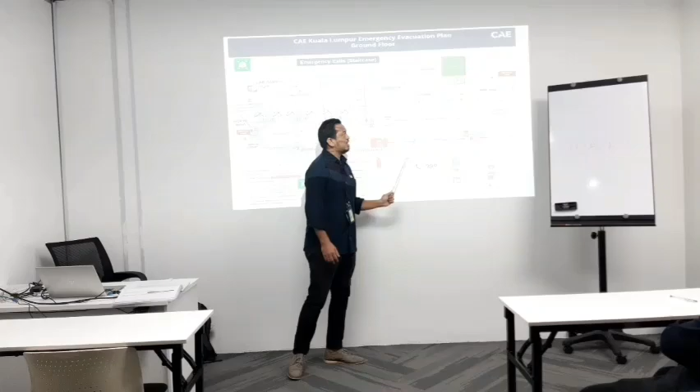At the south wing, we have another lobby at the entrance. So where's the exit? You can exit through the lobbies, and there is another escape route near the cafeteria. Looking at the facilities, the north wing is mainly for training sessions with simulators, while the south wing has our classrooms, located on the first floor.

So be aware that the exit areas are the north lobby, middle lobby, and south lobby, and we also have staircases. We have one at the north lobby, and another staircase here, numbers 4, 5, and 6. If you are sitting in the second lobby, you can use the nearest staircase, number 4 or number 5.

If you exit using staircase number 5, this is the shortest route for you to exit the building, as well as staircase number 4. This is another nearest staircase for you to evacuate.

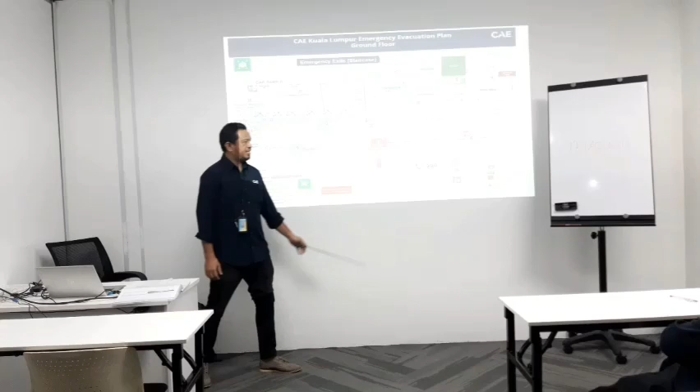So this layout shows the ground floor, and there is other information here, for example in case of fire, information regarding the fire extinguisher, and here to call 999 in case of emergency. The most important point for you to know is the assembly point, located at car park B.

So car park B - in case anything happens, you exit through the staircase and walk to car park B, where the assembly point is. There is another way, if you use staircase number 5, you can walk behind the building, heading towards car park B. So this is the assembly point.

In case of emergency, we shall gather here, and we shall collect the attendance sheet to make sure that everybody is out of the building. We have to confirm that everybody is safe during this assembly.

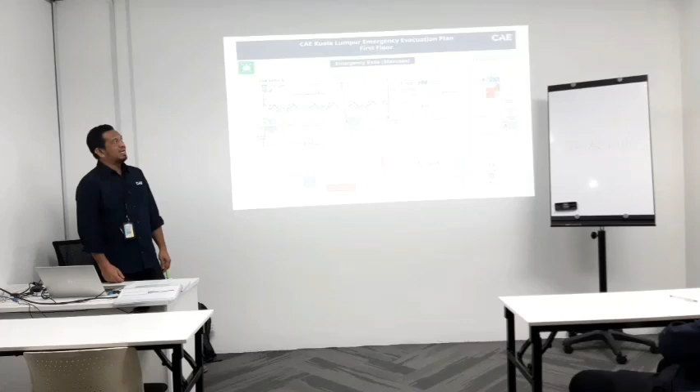Now showing you the facilities for the first floor. So we have the ground floor and first floor. Currently we are at the Kuching classroom. You can see that the nearest exit is staircase number 4, located at the middle lobby.

Since we have the CAE facilities layout for the first floor, I'm going to show you some other facilities. We have a surau, and a main office - in front of our classroom is our main office. There is also a simulator area. Basically, this area is not accessible to everybody, so you cannot simply go in and out. Within this area, you need an authorization card in order to access it.

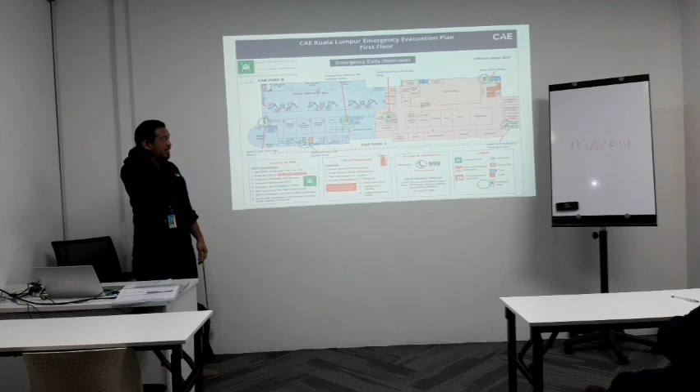Excuse me, where is the nearest toilet? The nearest toilet is at the surau, behind the surau. From our classroom in Kuching, you can go to the surau towards the end of the building, and there is another restroom accessible through this middle link bridge, and another washroom facility around here. So basically there are two, one for the south wing and one for the north wing.

For the ground floor, the restroom will also be at the same location. And if I show you the ground floor, the restroom is also available in the cafeteria. So very easy - you just minum kopi, and next to it there is a restroom.

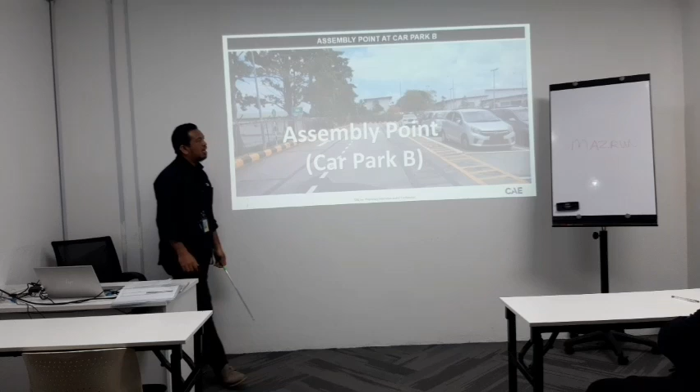Here is an example picture of our car park B. This is where the assembly point is, so everybody has to gather here. During an emergency, if you hear any emergency sound, you walk through to this point.

Bear in mind, do not run, but you can walk quickly. Do not run, do not shout, just avoid causing any chaos. Just walk quickly to the assembly point.

And then if you spot an emergency, raise the alarm, shout emergency, emergency. So this is something like if you see any potential of a fire, you need to shout to alert everybody that you are facing a fire or any critical emergency.

In case of fire, there is a break glass facility. This is to activate the alarm if you see any fire. You can break this glass and then activate the fire alarm. It will tell everybody the building will activate alarm warning. So in case of any possibility of fire, this is what you should do.

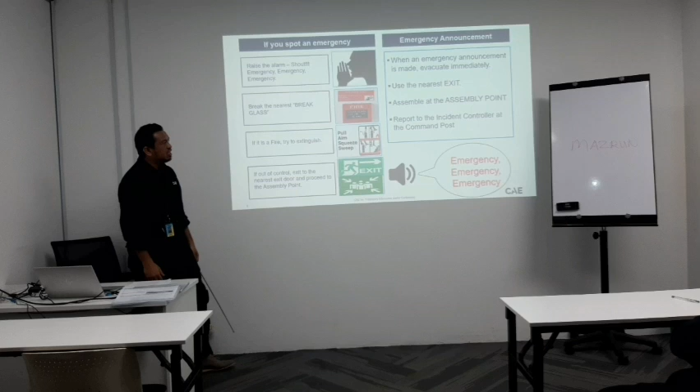You have to know how to use the fire extinguisher bottle. We have pull, aim, squeeze, and sweep. So basically, this is the basic principle of how to use the fire extinguisher bottle to do firefighting, if you can do so.

Some people don't know how to use it. They just take the bottle, don't know how to use it, and they throw the bottle into the fire. So do not ever do that.

And then we have exit signage. Be alert that there is exit signage in case you are not able to fight the fire. In case the fire becomes much worse, find the emergency exit and head to the assembly point, which is located at Car Park B.

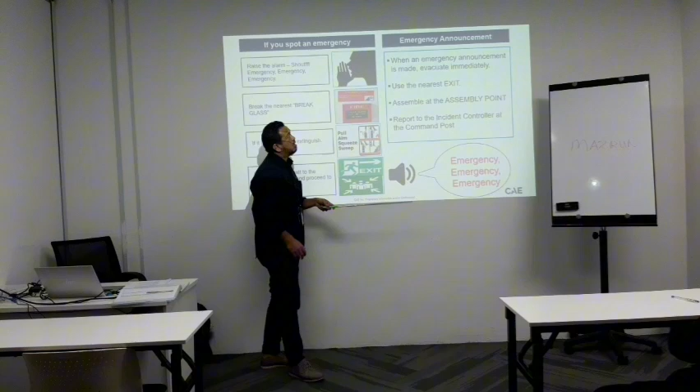When emergency is announced, if you hear any emergency announcement, evacuate immediately and use the nearest exit. If you don't know what to do, the first thing you need to find is the green exit sign. Then assemble at the assembly point, located at Car Park B, and report to the incident controller at the command post.

Lastly is the safety tips. Basically, the safety tips are for us around here. Do not drive your vehicle fast in this vicinity. Follow the speed limit and observe pedestrian movement, because we have a lot of people walking around.

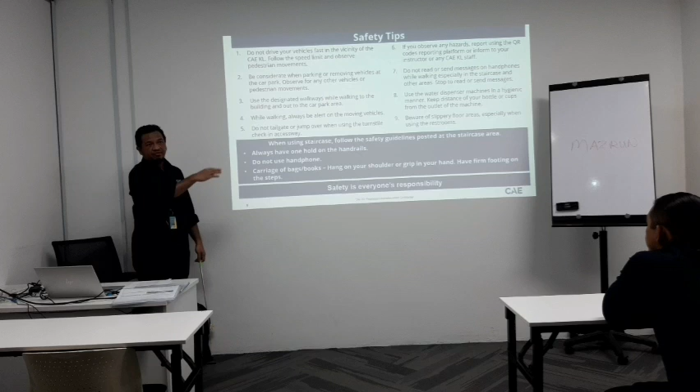Do not drive too fast because you have to drive around the facilities in order for you to exit the CAE building.

Be considerate when parking and removing vehicles at the car park: observe any other vehicle or pedestrian movement, and use the designated walkway while walking to the building and out of the car park area.

Another tip is while walking, be alert of moving vehicles. Maybe you are not aware that a car is driving through and you need to cross. So be alert. Do not use your phone all the time while walking. Be alert of what's around you.

Do not tailgate or jump over using the turnstile checking access way. If you observe any hazard, any potential hazard, you can report using the QR code. Basically, the QR code is for you to highlight any potential hazard.

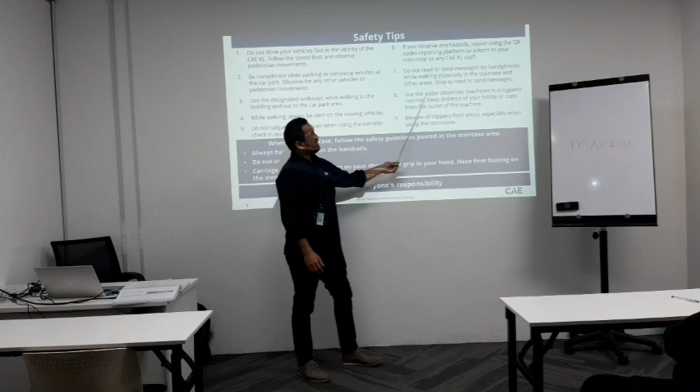Do not read or send messages on your handphone while walking, especially while using the staircase. Use the water dispenser machine in a hygienic manner. Keep the distance of your bottle or cup from the outlet machine.

Since we had COVID-19 last time, this has become something to alert everybody about. Do not let your bottle, or the neck of the bottle, attach to the water outlet on this dispenser. Keep it away. This is to maintain our hygiene.

Beware of slippery floors, especially while using the restroom. When using the staircase, follow the guideline: always have one hand on the handrail. Do not use your handphone, and carry baggage or books on your shoulder or in your hand. Have firm footing on the steps.

Okay, so that's just the safety tips. Any questions so far? No.

Are you guys okay with the facilities? After this, maybe you can have a look around, and remember the key point is to go to Car Park B in case an emergency happens.

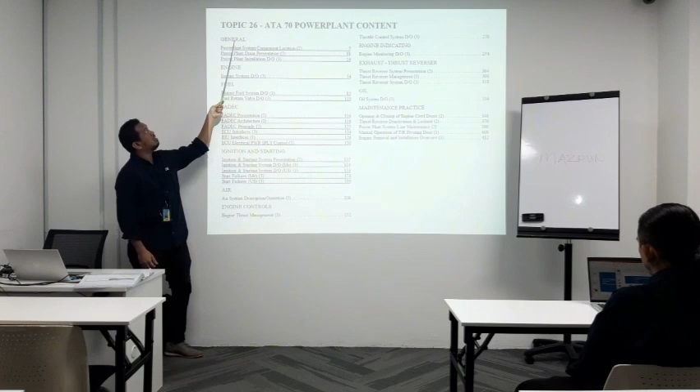Okay, our topic is Chapter 70, Power Plant. Over here we have the table of content for this session. We're going to cover 2 hours regarding engine general, and in this topic we're going to cover several subtopics, which is component location, engine drains, and also engine power plant.

We shall then cover engine description and operation. Over here we're going to have a look at the system overview. So these two topics we're going to cover for today's session.

Now in this slide presentation, you will be able to see the exploded view of the CFM56 engine, and be able to see the fan cowl, the thrust reverser cowl, and the center body as well as exhaust.

Now this engine, the power plant section, is the one that you see, and the engine itself is considered the core. The exploded view in this picture is the power plant. Another one I forgot to mention is the engine inlet. So all these are the power plant, starting with the thrust reverser cowl.

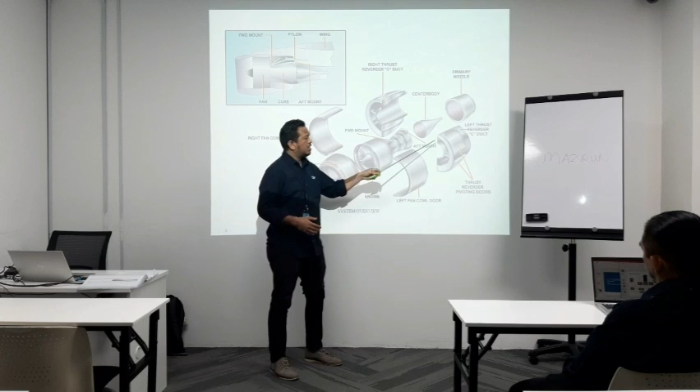For the A320, the config is using a blocker door type of thrust reverser system. So it will activate towards open whenever the thrust reverser is activated.

The fan cowl, later on we shall see there are 3 latches in order for us to open it. So unlock the 3 latches, we're able to open the fan cowl left hand side as well as the right hand side. While on the thrust reverser cowl, we've got 4 latches. You have to unlatch all 4.

Then we need to use an external device, the hand pump, to hydraulically open the thrust reverser cowl. You cannot pull the thrust reverser cowl by hand because it's quite heavy. But the fan cowl, we can use our own strength.

Once you open the 3 latches, using manpower we can pull it towards open. Then there is a facility, the hold open rod, for you to make sure that the fan cowl stays open, so that you can perform any maintenance tasks around this area.

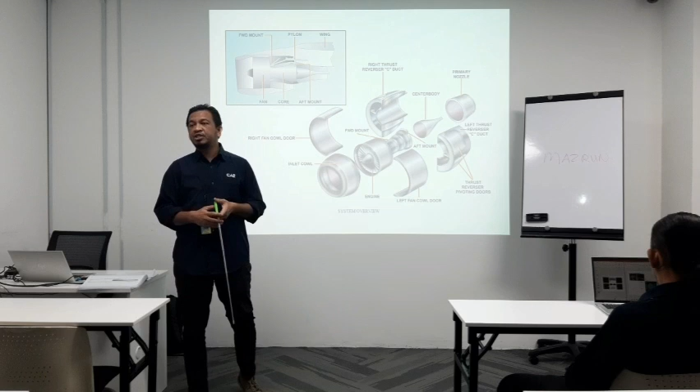So that's the power plant. Let's take a look at the core, where the core of the engine consists of the fan as well as the engine core. The fan and the core are mounted on the aircraft using a forward mount as well as an aft mount. The forward mount is used to take the thrust load, the engine thrust load. As the engine moves forward, the forward mount is the one that takes the thrust load and transfers it to the aircraft.

The aft mount is used to take only the vertical load as well as side load. The thrust load is only taken by the forward mount. From this picture, we're able to see the location of the forward mount, which attaches to the pylon, and the aft mount that also provides attachment to the pylon.

Okay, shall we move on? Yes.

Now we've got the system overview for the thrust reverser system. For the A320 thrust reverser system, it employs several defense lines to prevent thrust reverser activation in flight. The thrust reverser can only activate on the ground.

Due to an accident previously on the 767, even though it's a different aircraft, EASA certification requires several defense lines for thrust reverser activation during flight. There was an accident where the thrust reverser deployed during flight. It became scary, as it caused the flight characteristics to be jeopardized, and caused the aircraft to crash.

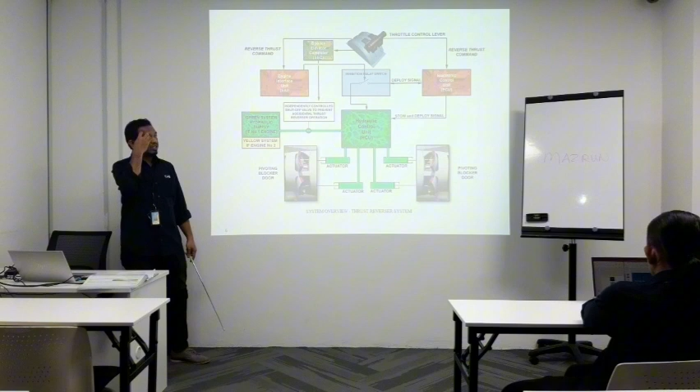This picture shows you the blocker door in the deployed position, and it is deployed by the activation of individual actuators, numbers 1, 2, 3, and 4. So it is obviously hydraulically operated.

The hydraulic supply may come from engine number 1, coming from the green hydraulic system, and engine number 2 may come from the yellow hydraulic system. So since we've already identified what components are available on the thrust reverser system, let's take a look at how the system works.

Excuse me, why do they use one green, one yellow system? Why can't they use only a single system, green for both engines?

Now on the A320, you're actually able to deploy one thrust reverser for landing. One thrust reverser activation is no problem because on the A320 the engines are located very close to the fuselage, close to each other. One thrust reverser deployed should be no problem.

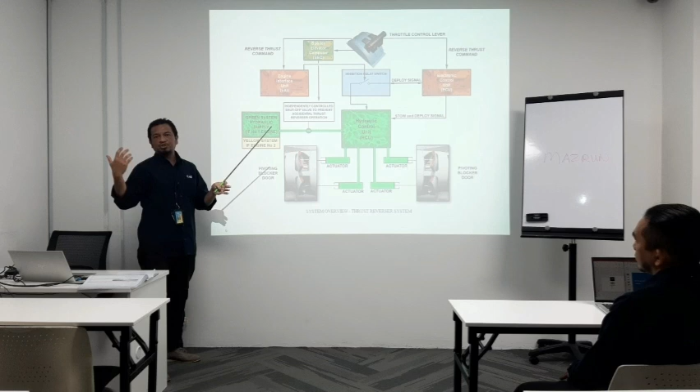In order to provide redundancy into the system, we've got the green system that supplies engine number 1, and the yellow system that supplies engine number 2.

In case the green system fails, the other engine can still deploy thrust reverser, using the yellow system as a redundant system. Same goes for the yellow system failing - you can use the green system. You can only use one thrust reverser, on the left hand side, at one time, which is not a problem.

The flight crew are still able to steer the aircraft in case only one side of thrust reverser is deployed. So it should be no problem.

The activation starts with the thrust lever. Once the flight crew move the thrust lever to reverse thrust, it sends a signal to the SEC, and at the same time it also sends a signal to the EIU.

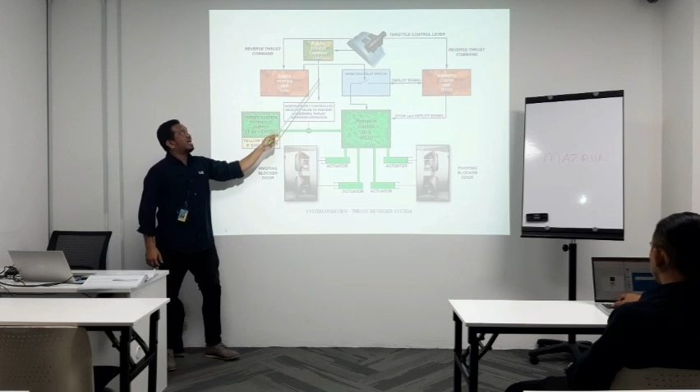Whenever the SEC sees that the aircraft is on ground based on the radio altimeter signal, it will then activate hydraulic shut-off. This allows hydraulic supply to the thrust reverser system, and this is actually breaking the first defense line. The permission is given by the SEC - once it sees the aircraft on ground, it gives permission. Without hydraulics, you cannot activate thrust reverser, meaning if the aircraft is in flight with no hydraulic supply, there's no thrust reverser in flight.

If the permission is only given by the SEC, we got the first defense line that will prevent thrust reverser deployment in flight. Now secondly, the second defense line is via EIU, the engine interface unit, which provides permission to the inhibition relay.

We already got thrust lever in reverse thrust. The second defense line - EIU receives signal from LGCIU, which is not shown here. LGCIU provides information on whether the aircraft is in flight or on ground. In case aircraft is on ground, the EIU will then provide permission to the inhibition relay and activate it. Once the inhibition relay makes contact, the ECU has control over the thrust reversal system.

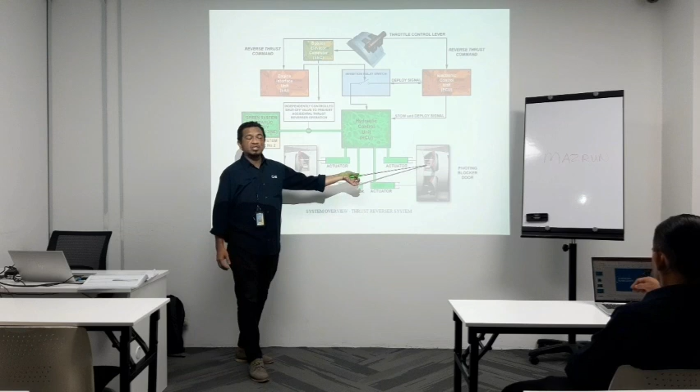ECU provides control over thrust reversal by controlling the hydraulic control unit, which allows hydraulic pressure to be supplied to all four actuators. Now the blocker door is in deployed position. Once the blocker door is deployed, the ECU then controls engine thrust, whether to have maximum reverse or minimum reverse. So the ECU is the one that commands the hydraulic system for thrust reversal, whether to open, extend, or close the blocker door.

The blocker door will start to move towards close once the thrust lever moves to the forward idle position.

So this is showing you the left engine, which is powered by green. The yellow system on the right engine is also identical - it's the same system, just that the hydraulic supply is coming from a different source.

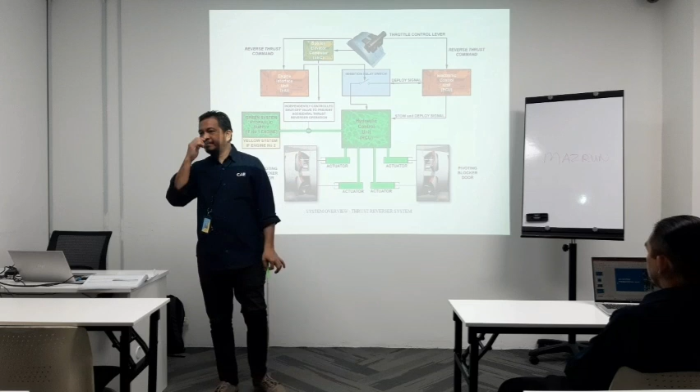Okay, any question? No question? Am I done, did I do a good job, or is nobody listening? Understand, okay, so very direct principle.

Alright, we shall then move on to component identification, component location. The first picture here shows you the ECU, the location of the ECU.

We have to be aware that for the CFM56 series engine, the right hand side is where you can find mostly dry components, while the left hand side of the engine mostly has wet components. Looking on the right hand side, we got the ECU and this is where it's located. The larger picture shows us the ECU, and we can see the orange ducting is the cooling.

So this is the orange ducting, the intake scoop. Air may go in, air may go out via this open port, and it's used to provide ECU cooling.

The ECU is mounted by 4 locking bolt attachments to the engine fan casing, and we got 15 cannon plugs located under the engine, under the ECU, and the ECU actually controls the engine using 2 separate channels.

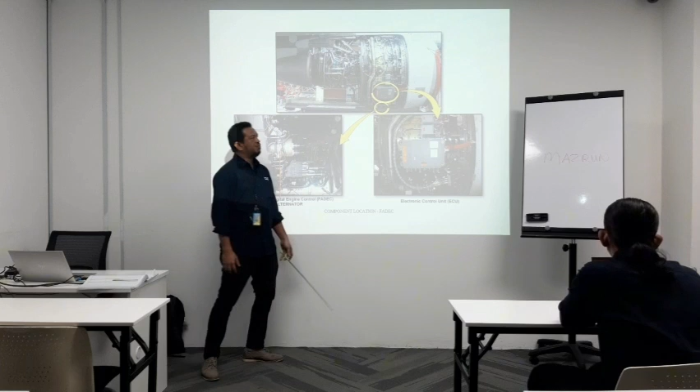From the same picture, we are also able to see the other component, which is the ignition exciter. This is for the system to provide ignition supply, to provide ignition starting.

At the bottom of the ECU, we are able to see the other component mounted on the gearbox, which is the PMA, Permanent Magnet Alternator. The PMA is driven by the gearbox. Inside the PMA is actually a mechanical driven alternator, and it has two independent power supply sources.

One cannon plug is used to provide power supply for channel A. The other cannon plug is used to provide power supply to channel B. So you can see two cannon plugs.

Once engine running and the gearbox also running, same goes to the alternator. Once the alternator running, it provides power supply to the ECU. The ECU is no more taking or using any power supply from the aircraft network.

Moving further, this is the picture of the ignition exciter. We've got two boxes. This independent box provides power supply to ignition A. The other box supplies ignition B. So we've got two igniter plugs at the combustor, which is located here.

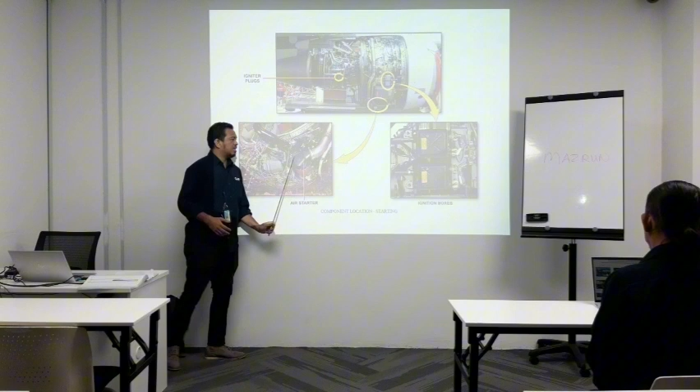Inside the starter there is a turbine that turns once the bleed pressure is applied to the starter, giving rotational motion to the gearbox. It will then turn the engine, and we can use this to start the engine.

The starter will engage right up to 50% N2 of engine speed. More than 50% engine speed, the starter will be cut off. The control of the starter is achieved by the ECU via the start air valve. The start air valve is the one that allows bleed pressure to pressurize the starter, or disallows the pressure.

The start air valve is solenoid operated, controlled by the ECU. So the ECU will look into the engine speed. If we perform engine start, the ECU will control the start air valve, allowing initial rotation until the engine reaches 50%.

Then the ECU will close the start air valve, because 50% is the speed of the engine that is able to reach self-sustaining speed, or idle speed.

Moving further, another component location, we are looking into the left hand side. Left hand side is where this engine is equipped with most wet components.

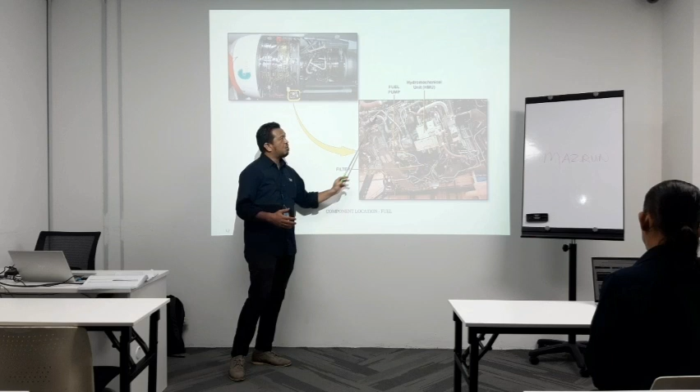We shall go into further detail in the next lesson regarding the operation of the HMU. But currently, we identified the components located on the gearbox. This picture shows you the aft face of the accessory gearbox. There are many components, many part lines, but the major components we are able to see here are the fuel pump and also the HMU.

Now we move on to component location for the engine air system, also known as engine control system, which is further divided into sub-control systems. The first sub-control system is the compressor air flow control. The second one is turbine clearance control.

Starting with the compressor flow control, there are two main systems that control the compressor airflow. The first main system is the variable bleed valve. These are the component locations, which are located at the fan area. We've got 12 of them.

Now this provides opening and closing in order to condition the air from the fan, from the booster, before it goes to the compressor. So to prevent choking within the compressor module, the bleed valve will open and close in order to condition the air.

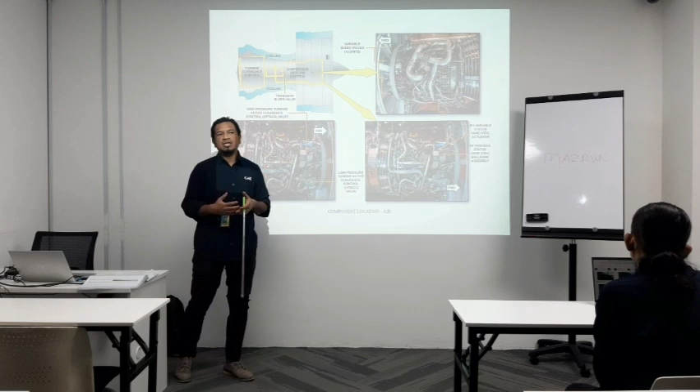Moving further, turbine clearance control is a system that provides cooling to the turbine component, basically controlling the turbine casing. The turbine's operation is to extract energy from the gas flow. The combustor gas flow will turn the turbine, extracting energy from this gas flow. With turbine blade as well as turbine casing, we can extract more energy by controlling the turbine casing clearance.

This clearance between turbine blade and turbine casing, maintaining the gap, is achievable using cooling air. The cool air may come from the secondary airflow through here, and we have the low pressure turbine active clearance control. This valve controls cold air and provides cooling to the turbine casing.

Another subsystem is the high pressure turbine active clearance control. It does the same thing - it provides cooling, controlling turbine casing expansion to provide a smaller gap. Whenever you have correct clearance between turbine blade and turbine casing, you can extract more energy. So the cooling is achieved by two subsystems: high pressure turbine active clearance control and low pressure active clearance control.

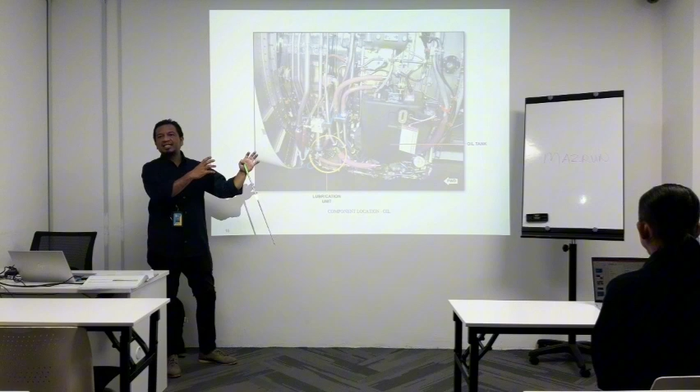Next, looking at the oil component location. This picture shows the left hand side of the engine, where the main component is the oil tank, used to house the engine oil. The oil system on this engine is a dry sump system - you have a dedicated oil tank separate from the oil system. Above the oil tank we have the oil quantity transmitter, which provides sensing of the engine oil level.

And then we have the oil cap, used to provide servicing, and facilities for inspection. The facilities of this oil sight glass allow maintenance personnel to see the actual quantity inside the oil tank.

From this picture, we can also see the lube unit. The lube unit is a unit that houses the high pressure pump and the scavenge pump. The high pressure pump is driven by the accessory gearbox. From this picture we're unable to see the gearbox, however at this location we have a gearbox used to provide rotational motion to the pump.

The lube unit also consists of the oil filter. This is the oil filter housing, which is to prevent contamination over the lubrication system.

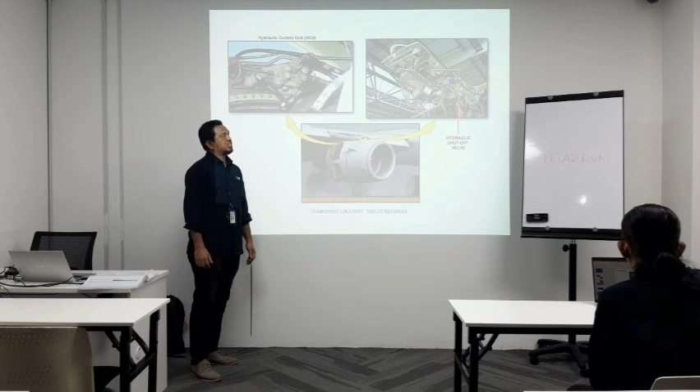Next, component location for the thrust reverser. The thrust reverser here is the hydraulic shut-off valve, located at the pylon, accessible from the left-hand side. Then we have the HCU, hydraulic control unit, located at the forward flange of the C-duct. We have a cannon plug, two cannon plugs, and another cannon plug for the pressure switch.

This is the one controlled by the ECU in order to deploy the thrust reverser system. So here is the HCU location, and here is the hydraulic shut-off valve location. Alright, that's the component of the thrust reverser.

Alright, we have completed component location. Any questions?

Good? No question. Can you guys remember all the components and the location of the components? Some of it. Alright, basically you got an idea of the components.

Later on we shall go further in detail on how the system works, the operation.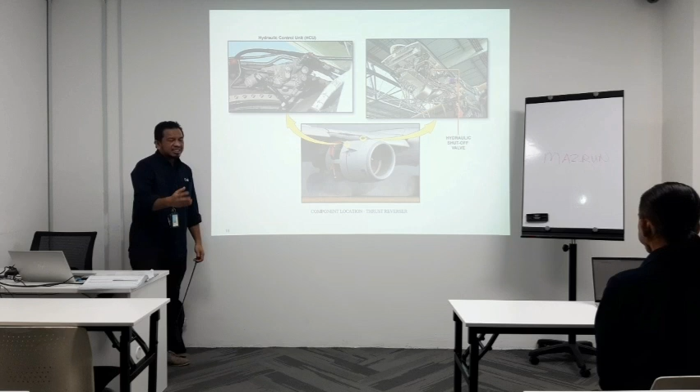The picture shows you the best view, taken from the manufacturer, where you can see, no engine, but you're able to see the location of the hydraulic shut-off valve. Some of the pictures are unable to be shown on the slide, but later on we shall go further in detail on the system operation.

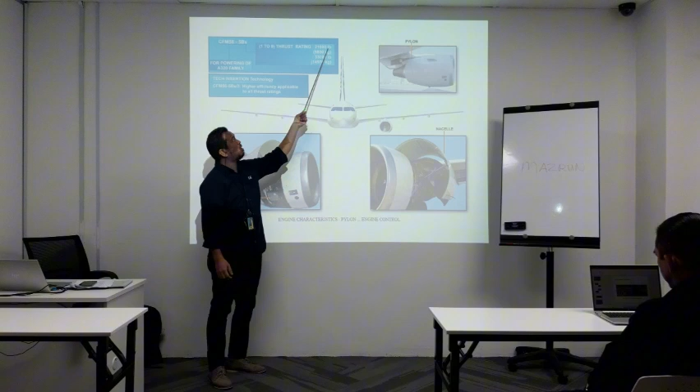That's 5BX. So 5B is the model used on the 320, and X is the thrust rating, which can be numbered from 1 to 9. Later on we shall see the representation of 1 to 9. Basically, 1 covers from 21,000 pound thrust, and it can go right up to 33,000 pound thrust. So depending on the type of variant that you have, it will give a different engine thrust rating.

Now, the tag inscription CFM56 5BX. X, as I mentioned, is rated 1 to 9, which shows you the engine thrust. We got /3 - this is one of the variants where /3 means higher efficiency, applicable to all thrust ratings.

The other variant is 5BX/3, or maybe you may have a /P engine. The /P engine has higher relight capability. So depending on the variant that you have, maybe you have 5BX/3 or /P engine.

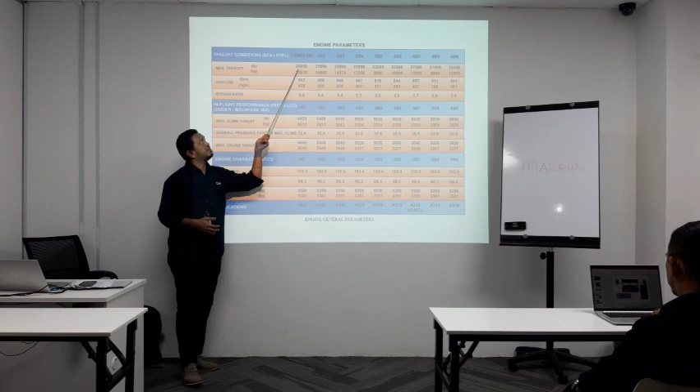Now, there's 5BX, X representing a number from 1 to 9. Here's an example, and here you've got maximum takeoff thrust in number, in pound or kilo. So looking into 5B1, 5B2, 5B3, right up to 5B9: 5B1 is 30,000 pound thrust, 5B2 is 31,000 pound thrust, 5B3 is 33,000, 5B4 is 27,000 pound thrust, and you can see the difference right up to 5B9. These are the variants offered by Airbus.

For Asia, mostly they use the 5B4 engine, which is 27,000 pound thrust, or maybe the other variant is 5B6, 23,500 pound thrust.

And this schedule shows you many more information, for example like maximum climb thrust, overall pressure ratio, and we got bypass ratio. Looking at the 5B4, it's 5.7 to 1 bypass ratio. The 5B6 is 5.9 to 1 bypass ratio. So these show you different engine variants, and it has a slightly different configuration.

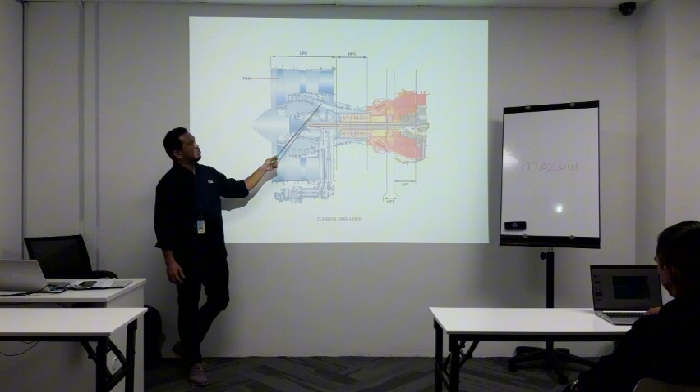And we got primary airflow that goes to the core of the engine. This is the air used for combustion, and only about up to 15% of thrust can be generated at the turbine section. But mainly the primary airflow is used to provide rotational, or extraction, energy from the turbine, which is used to provide rotation to the fan blade, and the fan is the one that propels the engine to move forward.

Starting with the fan: the fan is made from titanium material, and it consists of 36 blades. Moving further, we've got the booster section, which consists of 5 stages, but the booster alone is 4 stages.

And we've got VBV, variable bleed valve. This is the subsystem for compressor flow control, which is used to condition the air before it goes to the high pressure compressor. So the air will pass through the booster section, and it will boost up pressure by about 1 to 200 psi.

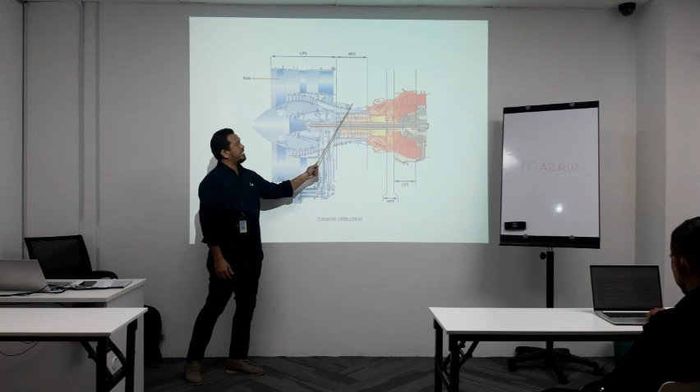Here we're able to see the component used to control the variable stator vane. The variable stator vane will adjust the angle of the first 5 stages of the stator. This is to increase the stall margin of the engine, so it's able to provide more compression to the engine depending on the engine speed.

And then we got the combustor. For this engine, Airbus or the engine manufacturer offers 2 types of combustor: annular type or dual annular type combustor. In this picture, we see the single annular type combustor.

And we got the single stage of HPT, high pressure turbine. This is used to provide rotational motion to the high pressure compressor by a single shaft.

And next, we got the low pressure turbine. The low pressure turbine is used to extract energy, and it provides rotation for the low pressure compressor, which consists of the booster and also the fan blade.

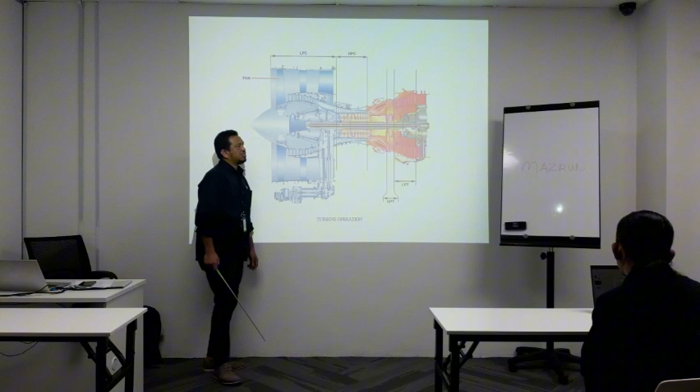Now, you're able to see that the low pressure compressor is driven by the low pressure turbine, and the high pressure turbine is driving the high pressure compressor. It is a twin spool engine, and the shaft is a coaxial shaft. One shaft, the low pressure shaft, is located at the inner, and the outer one is the high pressure shaft. Both shafts rotate clockwise, with reference looking forward, so both shafts rotate in the same direction.

The shaft is supported by 5 bearings. Bearing number 1 is located at the most forward, which is a ball bearing type. Then we got bearing number 2, which is a roller bearing, also used to support the LP shaft. The LP shaft is also supported by bearing number 5. Bearings number 2 and 5 are roller type bearings.

The HP shaft is supported by 2 bearings, bearing number 3 and bearing number 4. Bearing number 3 is a combination bearing, also known as ball bearing. We shall see further detail after this. These are the 2 bearings used to support the HP shaft.

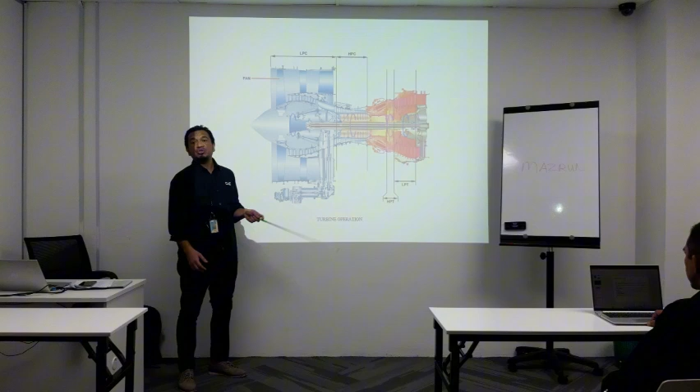What's the material of the bearing? The material of the bearing is nickel alloy type, and mostly the same type of material, but the configuration may differ. The configuration for the ball bearing is used to take up the thrust load, but the later stage bearing is configured as a roller type of bearing.

Okay. Any other question? No. Alright.

Over here we got the bearing configuration. Since we have the LP shaft, low pressure shaft, and the HP shaft, as I mentioned, bearing number 1, bearing number 2, and bearing number 5 are used to support the low pressure shaft. So we've got 5 bearings: number 1, 2, and 5 for the low pressure shaft, and bearing number 3 and bearing number 4 used to support the high pressure shaft.

Bearing number 1, 2, and 3 is located in the forward sump, where the sump is used to provide lubrication and house the bearing. So basically this is where the forward sump is. Oil from the oil system lube unit will lubricate all 3 bearings in the forward sump.

And then we got the aft sump, which is located here, where we can find bearing number 4 and number 5. The aft sump also provides lubrication for the bearings. Once the bearing is lubricated, it returns to the oil tank via a scavenge pump located in the lube unit. So the compartment to house the bearing is divided into 2: the forward sump and the aft sump.

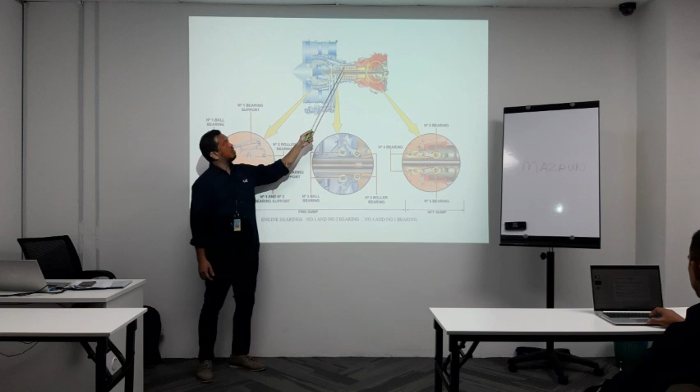The detail for the forward bearing: bearing number 1 is a ball bearing type, bearing number 2 is a roller bearing, and bearing number 3 is a combination bearing, a combination between ball and roller bearing. The ball bearing is used to take up thrust load coming from the HP shaft, HP compressor, and high pressure turbine, so all the thrust is taken by bearing number 3. Then here is the supporting bearing for the HP shaft, which is a roller bearing, bearing number 5, also a roller bearing.

Next, looking into the air seal. This is a picture of the forward sump where we've got the bearing, and in this case we've got a pressurizing tube.

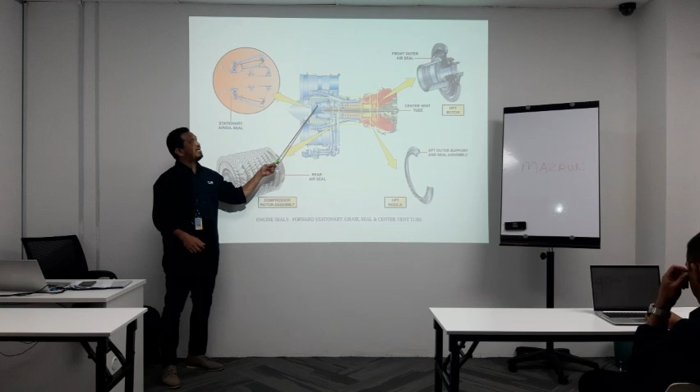The pressurizing tube carries air coming from the booster. By looking at this picture, we can see the pressurizing tube. Pressurized air from the booster provides sealing to the forward sump, preventing oil from coming out and keeping the oil within the sump using pressurized air.

So the air that tries to keep the oil within the sump is governed by the air seal, also known as a labyrinth seal or a knife-edge type of seal. The seal requires pressure from the compressor just to keep the oil within the sump.

Here are the basic principles: the bearings used to support the shaft, and the sump has 2 compartments - the first compartment where the pressurized air is, and the second compartment which houses the bearing.

The bearing is lubricated by pressurized oil coming from the oil jet to lubricate the bearings. Once the oil has lubricated the bearings, it will be scavenged by a scavenge line, and any air bubble will be vented into the core of the shaft and out to the exhaust.

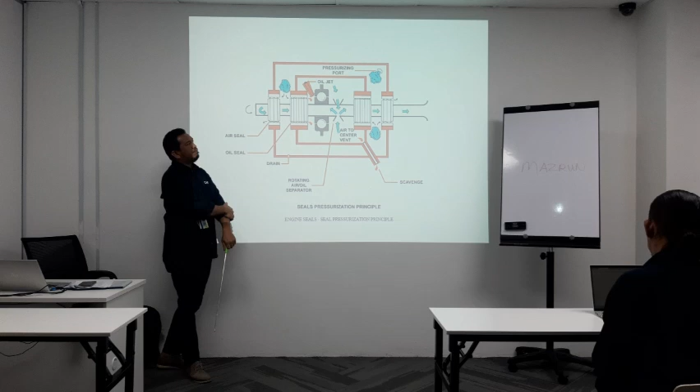Air coming from the compressor will pressurize the sump, the outer part of the sump, the outer chamber, and the air tries to push against any oil within the sump from coming out. So air will try to push in, and oil pressure that tends to move outward will be kept within the inner chamber of the sump. This is how the oil is kept within the sump.

There is a disadvantage with this type of seal. Whenever pressure is unavailable, or very low, it will tend to allow oil to come out through the labyrinth seal. So the pressure has to be proportional to the engine rotation to keep the oil within the sump area.

That's the basic principle and understanding of the oil sealing.

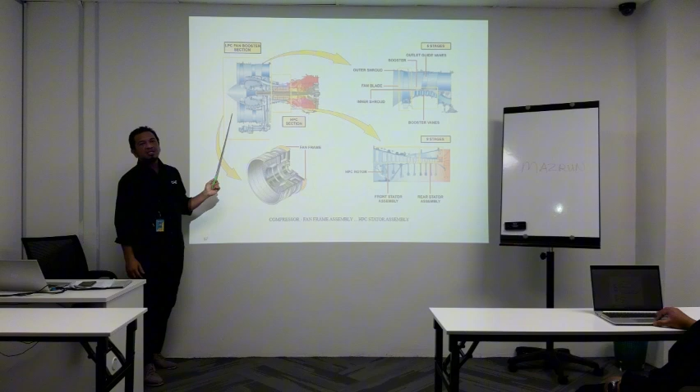Moving to the section where I already explained the forward part of the engine, which consists of the fan and also the booster. The fan and booster is also known as LPC, low pressure compressor. And the high pressure compressor, the HPC section, consists of 9 stages.

Here is the detail for the low pressure compressor, consisting of the fan blade and the booster. We've got 3 stages of the booster, where primary air is used to provide air for combustion, and secondary air is used to propel the engine forward.

And the HPC section, as I mentioned, consists of 9 stages, and here there is a variable stator vane. The variable stator vane changes the angle of the vane in order to increase the stall margin of the engine.

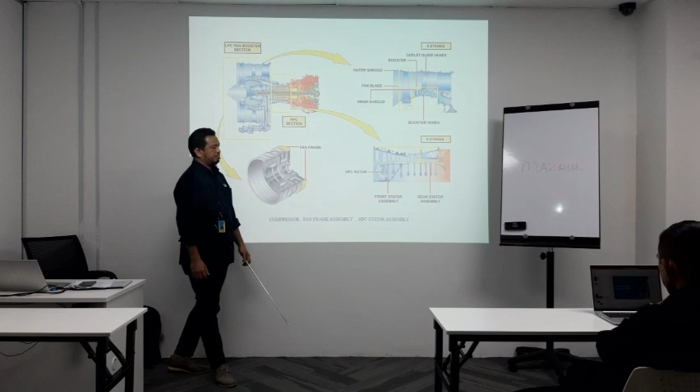Here we've got a fan frame, one of the strongest areas at the fan. The fan frame here is used to provide forward mounting facilities.

Before we move further, here are several terminologies regarding the compressor. Term number 1 is known as stall, and term number 2 is known as surge. Do you guys know the difference between stall and surge? Anybody? No? Can you take a guess?

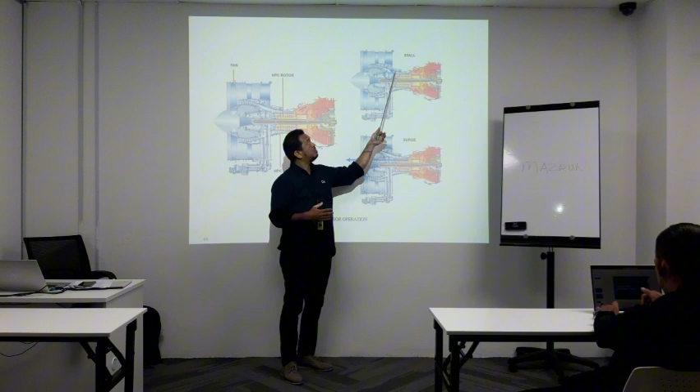No idea. Now, stall means it is due to a local effect of the blades. In case a blade has distorted or been damaged, it can cause stall, making it unable to generate compression at that blade itself. So it's called stall due to the local effect.

The other term is surge. Surge means that whenever all the stages within the compressor section are stalled - combination of all stages becoming stall - we call it surge. So air that's supposed to be compressed may not be able to compress anymore.

During engine surge, it can cause fluctuation in speed indication, fluctuation in exhaust gas temperature indication, because the engine is now fluttering. The engine is unable to compress the air, and it can cause the air to expel in the reverse direction. That is surging.

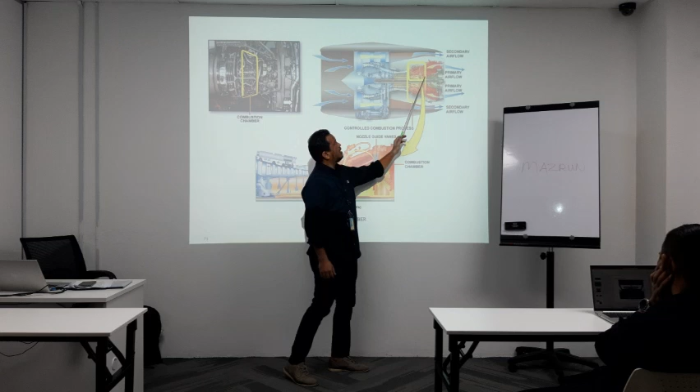Next, we move on to the combustor section. The combustor is located between the HPC and the turbine section. In this case we've got a single annular combustor. It consists of 20 fuel nozzles around the combustor itself, and 2 igniter plugs.

It will provide gas expansion, and as the gas expands, it will hit the high pressure turbine. The high pressure turbine is then used to provide rotation to the high pressure compressor.

The flame in the combustor happens within the outer liner and inner liner. This is where the oxygen and fuel are mixed, and the ignition introduced will cause the flame. This is where combustion happens, and it's considered a continuous type of combustion, as long as fuel and ignition are provided during initial rotation of the engine, so the flame becomes continuous combustion, continuously generating gas expansion.

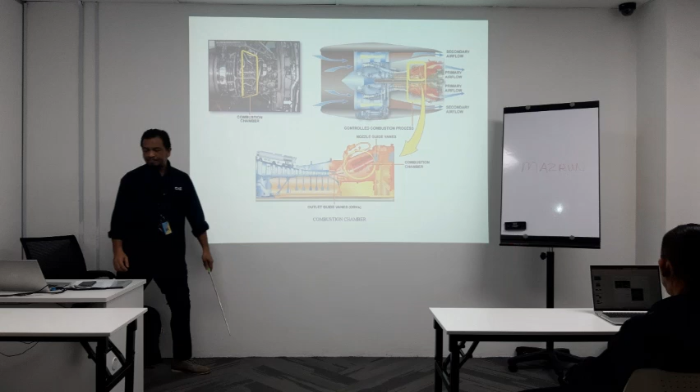Here is the combustor, where the air provides fuel and air mixture here. This is where the fuel comes in, and the fuel and air mixture is burned here. This is the outer liner, this is the inner liner, and you can see that the air will also dilute within the combustor.

It will dilute and provide cooling from the liner. As the gas expands due to combustion, the expansion will then be delivered to the turbine section.

Here is another picture of the fuel nozzle, equipped with 20 fuel nozzles around the combustor.

Moving further is the turbine section. The turbine section consists of the high pressure turbine and the low pressure turbine.

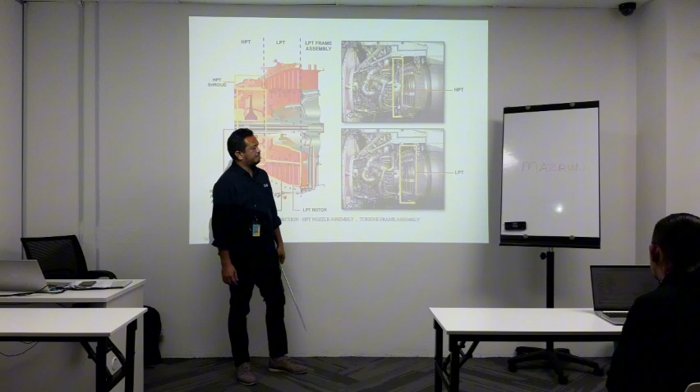Looking at the actual component, this is where the high pressure turbine is located. And then the low pressure turbine, which is here, where you can see several cooling tubes used to provide cooling to the turbine casing. The high pressure turbine consists of a single stage, and the low pressure turbine consists of 4 stages.

It extracts energy from the expanding gas. It will then provide rotation to the low pressure shaft, which in turn rotates the fan blade.

Next, we see a picture of the accessory drive. So the accessory drive, what we have here is the gearbox, and here shows the forward direction. The gearbox is driven by the transfer gearbox.

The transfer gearbox is driven by a tower shaft, which is driven from the high pressure compressor. So the high pressure compressor turns the transfer gearbox, which then turns the high speed gearbox, and the high speed gearbox then turns the accessory drive.

We've got the first accessory drive, which is the IDG, integrated drive generator. What is the purpose of the IDG? Electrical power to the aircraft. It provides electrical power to the aircraft's electrical network.

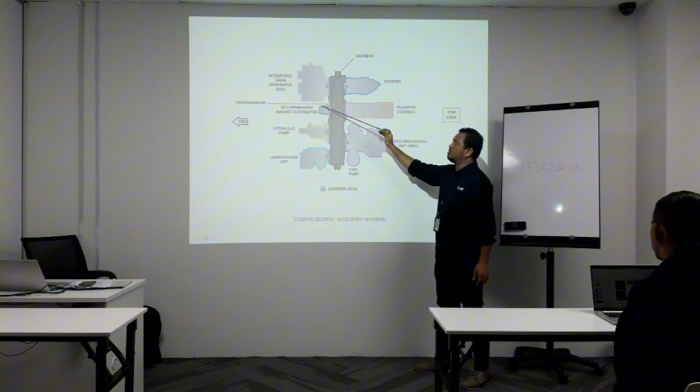This rotating device is the component we saw earlier, where it provides power supply to the ECU, which consists of 2 cannon plugs, one for channel A, one for channel B. So we've already seen this before.

And then we've got another rotating device, which is the hydraulic pump. This is used to provide pressure to the hydraulic system. The green system is engine number 1, and yellow system is engine number 2.

Another rotating device which is aft of the gearbox face: we've got fuel pumps. Fuel pump here is a two-stage type of pump, which is a low pressure pump and also a high pressure pump. And piggyback to the fuel pump is the hydromechanical unit.

This hydromechanical unit is also a rotating device used to provide control over the engine control system. It will provide control to all the servo actuators.

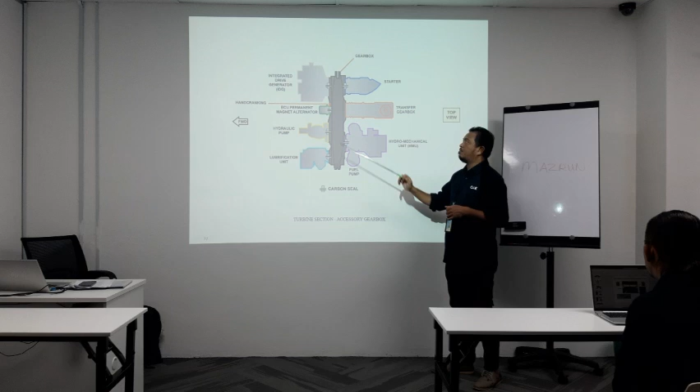And another rotating device is the starter itself, which is used to provide initial rotation to the gearbox, and it will then provide initial rotation to the engine.

We can see that all the rotating device attachments to the gearbox are governed by carbon seal. Carbon seal is used to prevent oil leaks between the two components, the gearbox and the rotating device.

Next, we have the aerodynamic station. The aerodynamic station is used to identify components at a specific location. We have station 0, located in front of the engine.

We have station 2, located at the engine inlet. We have station 12, also located at the engine inlet, but at the outer area of the fan. We have station 13, located very near the frame, also the outlet of the fan.

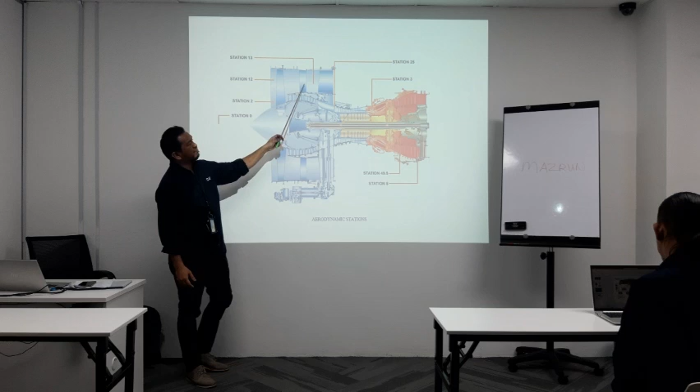We have station 25, which is just before the HPC, and then station 3, the outlet of the high pressure compressor. We have station 49.5, where we can find a device known as EGT sensors, or exhaust gas temperature sensors.

And then we have station 5, located at the last stage of the high and low pressure turbine. So this station number is also used to identify components as well as location.

You may find other sensors known as T25, for example, which is located here. If you hear about sensors known as T3 or P3, these measure temperature at station number 3, located here. If you find a sensor known as PS3, that is a pressure sensor located at station number 3. So the station number can also be used to identify the location of the sensor.

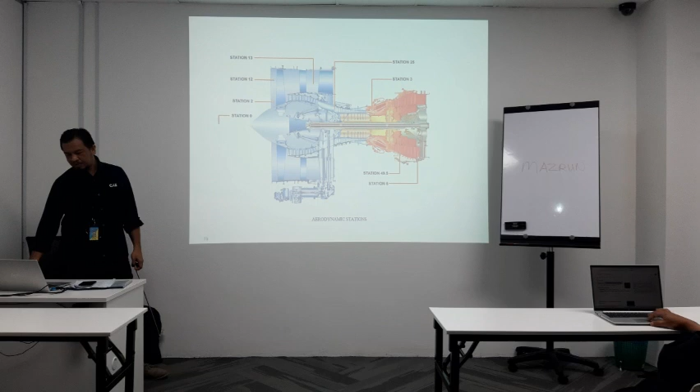Next, we have the borescope plug, borescope port. The borescope port consists of 23 ports. We have port A and port B located at the fan area. These ports are unplugged, there is no plug. In order to access the borescope for inspection of the internal engine, you don't have to remove any plug at this location.

And then we have another borescope plug located around the 5 o'clock position. This is to facilitate inspection for the HPC, and these plugs are identified as S01 right up to S09. We can find the details in the EMM reference.

And then we have the combustor. In order to perform borescope inspection in the combustor area, there are facilities of 4 ports. The port also includes the igniter port, igniter plug. So we have two igniter plugs located at this location.

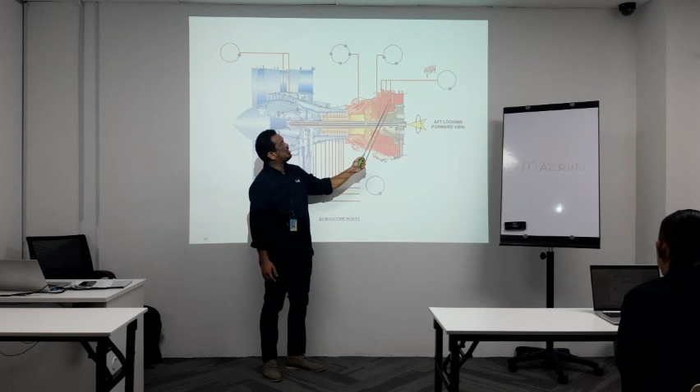Igniter plug located at this location, which is not shown in the combustor, but the igniter plugs, two of them, can also be used to provide borescope inspection. This one is not an igniter port, but provides facilities for inspection of the later stage of the turbine section. This later stage of the turbine section can also be accessed by another port, located around the 4 o'clock position.

So there are some borescope ports not shown here, but these are the facilities given by the manufacturer in order for us to perform internal core inspection.

Okay, and we have done the basic description and operation. Any question, guys? Hope you guys understand the description and operation about the engine. These are the basic principles. If you have any question, feel free to ask. Okay? Okay, good, good.

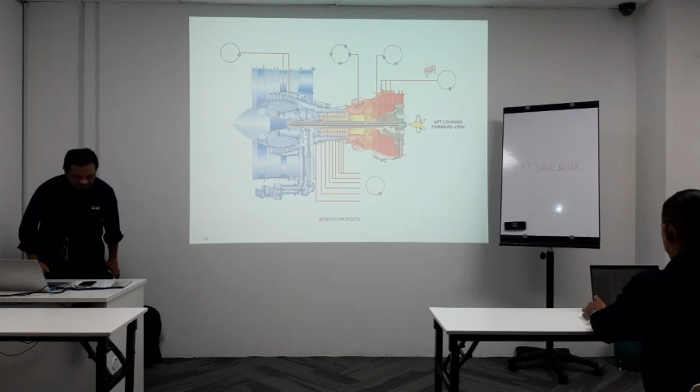Alright guys, so we have come to the end. Before that, let's do some recap on what we have learned. Basically we already gone through the general introduction about the engine, we gone through component location, and we also gone through description and operation. Now let's do some recap on what we already covered.

The power plant section uses a blocker door type of thrust reverser. We have latches, 3 latches, not shown here, but to secure the fan cowl it requires 3 latches, separate between the left hand side and the right hand side.

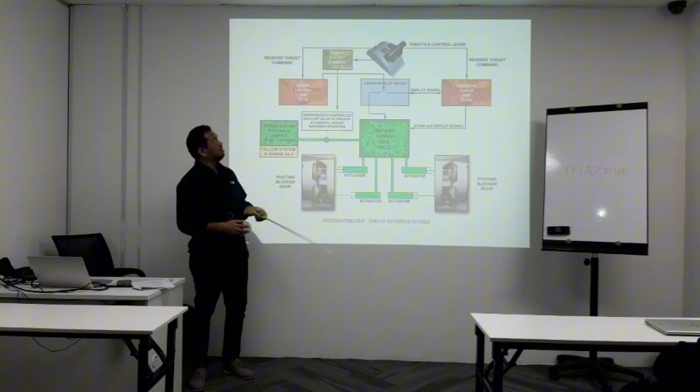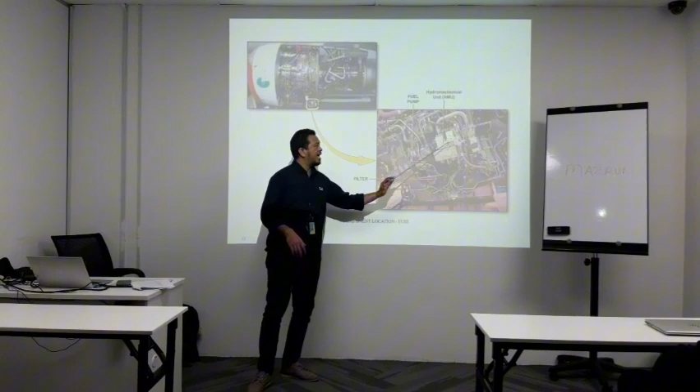Next we cover the air system, where the air system consists of compressor flow control and also turbine clearance control. The subsystem of compressor flow control is the VBV, variable bleed valve, and another subsystem is the variable stator vane. These two systems increase the engine stall margin.

Turbine clearance control is divided into subsystems, which is low pressure active clearance control and also high pressure active clearance control. These two subsystems increase the energy or efficiency of the engine by extracting more air from the turbine by maintaining clearance between the turbine and casing.

And we already covered the oil system component located on the left hand side, which is the oil tank. The lube unit can be found on the left hand side of the engine.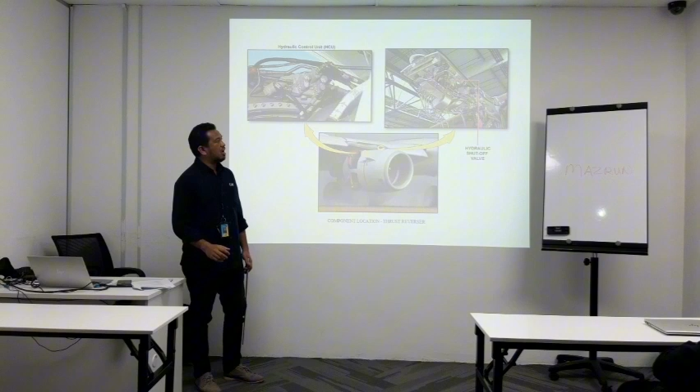And we cover the thrust reverser component. One of it is the shut-off valve located at the pylon, and hydraulic control unit located at the engine itself, but it is on the right hand side of the engine.

Sir, I have a question. What's the purpose of the shut-off valve?

So just now, if we look at the previous schematic diagram, the shut-off valve provides hydraulic supply to the thrust reverser. So the hydraulic supply to the thrust reverser is governed by the SEC computer.

Just now, if we reverse or take a look at the previous slide, so from this slide, this is the hydraulic shut-off valve, the one that is located at the pylon. So the SEC computer is the one that provides permission to the shut-off valve.

Like I said, for the ECU to control thrust reverser, it requires these two permissions. These two permissions are a defense line to prevent thrust reverser deployment, to prevent uncommanded deployment or any deployment in flight, which requires permission from different parties, different components.

Does the SEC provide command to both engines independently, or coming from a single SEC? Now the SEC, the SEC computer number 1 is required for both sides, left hand side and also right hand side thrust reverser. SEC computer number 2 requires left hand side, SEC computer number 3 requires right hand side.

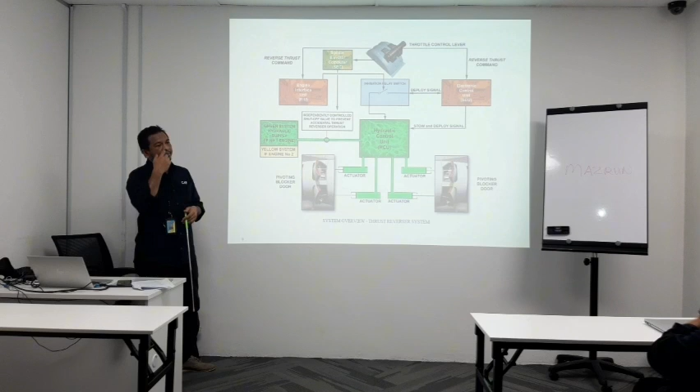So to deploy both thrust reversers, it involves 3 computers. Number 1, SEC computer number 1, is mandatory. How many SECs do we have in one aircraft? Altogether we got 3 SEC computers, and the primary purpose is to control flight characteristics. But the secondary function of this SEC computer is also to provide permission for the thrust reverser.

Okay. So these two give permission, then only the ECU is able to control the thrust reverser.

Next one, oh, we already covered this - component location. This is a picture of the hydraulic control unit just now. This is the one that is controlled by the ECU to deploy the thrust reverser.

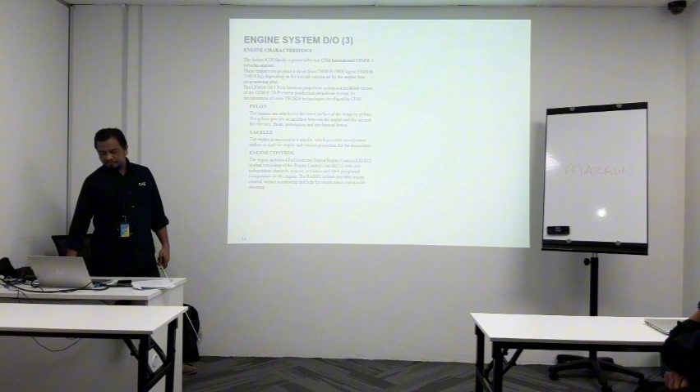And next, we have done the recap for component location. We are now moving to the engine description and operation. For the recap, we know that the engine has several variants, and the variant is according to the thrust rating, which is numbered from 1 to 9. So the variants from 1 to 9 represent different engine thrust.

If you have the 5B3 model, then you will get 33,000 pound thrust. So this one is mostly used on the A321. If you have the 5B4 engine, then the thrust rating will be 27,000 pound thrust.

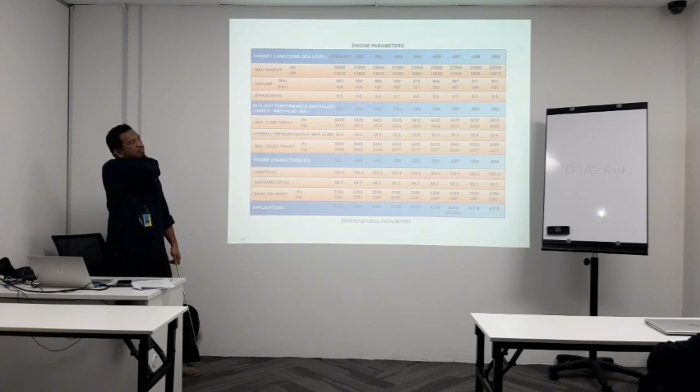And it has some other parameters, for example like the bypass ratio, depending on the variant that you have. Which variant is mostly used in the A320 series? Mostly the airlines use the 5B4 engine and 5B6 engine.

In case the airline requires a more powerful engine, maybe due to extra passengers, extra cargo, and they are operating somewhere in a hot area country, for example like the Middle East, mostly they require a higher engine rating. For example, the 5B2 engine, which is 31,000 pound thrust, is considered high power. Same goes for 33,000 pound thrust, the 5B3, considered high power.

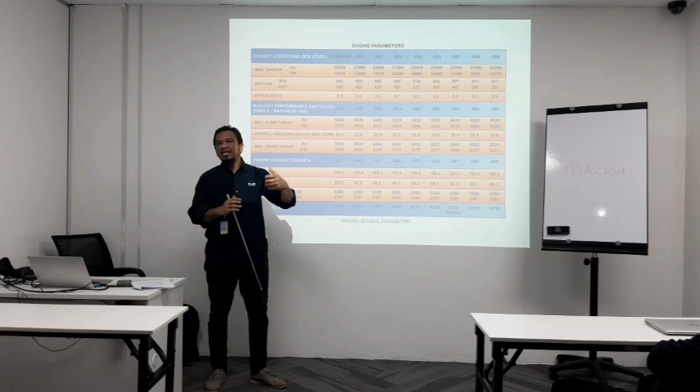Like in Asia, they would like to use 27,000 pound thrust or 23,500 pound thrust, which is sufficient for our usage. Because if you are operating at a very hot country like the Middle East, the engine thrust is reduced. So you cannot carry more passengers, you cannot carry more loads, you have to reduce load. But the airline doesn't want to reduce the load, they want to carry more passengers. So they require a higher thrust rating in order to get the aircraft off. So the higher thrust rating is much more preferable in hot countries, or if you are operating in hot countries.

For example, Asia is operating within the Asian region. They are not going to somewhere in the Middle East, so there is no necessity for them to use a higher thrust rating. So this is what is being offered by Airbus.

And then let's do a recap regarding the turbine operation. So turbine operation consists of several main sections.

You guys remember how many stages of the booster? 9 stages? Is it correct? 5 stages. How about Mr. Azlan? Is it 5? Yeah, it is 5 stages.

So it consists of 5 stages, and we got primary airflow, which one provides the highest thrust to propel the engine forward? What is it coming from? The fan. Coming from the fan, which is about 80% thrust generated from the fan.

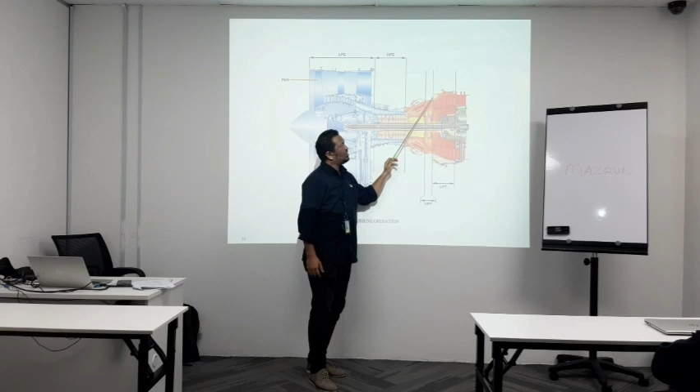And the fan is driven by how many stages of low pressure turbine? 4 stages. 4 stages of the low pressure turbine. So you can see that since the fan is very large, you get more extracted energy from the low pressure turbine. You provide rotation via a single long shaft here, and this is where the thrust is mostly being produced by the fan, which is 80%.

And we already covered engine bearing. So the shaft just now is supported by several bearings, and the HP shaft is supported by bearing number 3 and bearing number 4.

You guys remember what is the bearing number 3 configuration? Ball bearing. It's a ball bearing. Basically, it is a combination of ball bearing and also roller bearing. So ball bearing is...

Anybody? Why do they design the ball bearing configuration? To transmit thrust. Yeah, to transmit thrust. Basically, ball bearing is used to take up forward thrust.

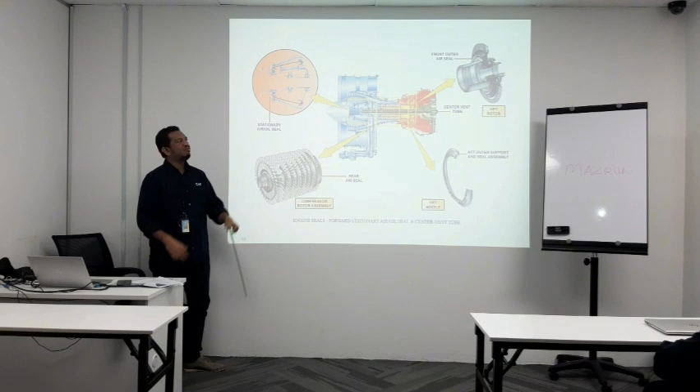And the air compressor is also used to provide oil sealing, or to keep the oil within the sump via this labyrinth seal. So it requires air pressure.

And then we cover the engine construction, the fan, the HPC, which consists of 9 stages, 5 stages of booster. We already covered this. This is just to show you the individual picture.

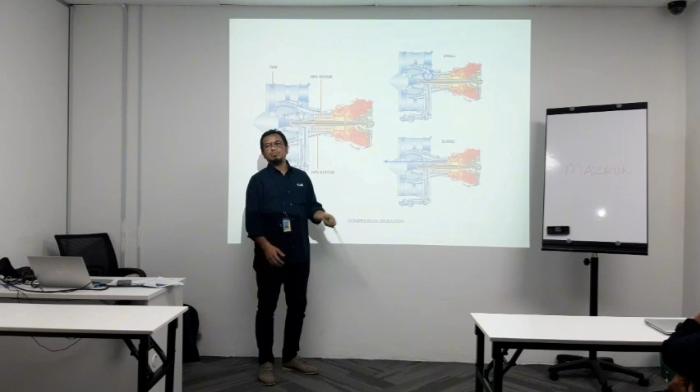And we covered the terminology of what does it mean by stall, and we already covered what does it mean by surge. Stall means a local effect due to one blade that is stalled, but if you have more blades, for example more stages, in case all the stages are stalled, that means there is a tendency to become surge. Normally it comes with other indications like fluctuation, and it may also cause a loud bang when surge occurs.

Which one is worse, stall or surge? Which one, sorry, which one is worse? Compared to stall...

Stall may result in noticeable degraded engine performance. But surge, the effect is very severe. It may cause the flight crew to shut down the engine due to the surge. For example, especially during takeoff, if the engine surges, you may hear a loud bang, and the indication is fluctuating, so the engine becomes useless, becomes hopeless.

So in order to avoid a worse situation, the flight crew may have to shut down the engine, depending on the flight crew's decision. Because normally surge comes with a loud bang, fluctuating indication, and it may also cause vibration. So vibration is something we don't want during flight. So the flight crew may decide to shut down.

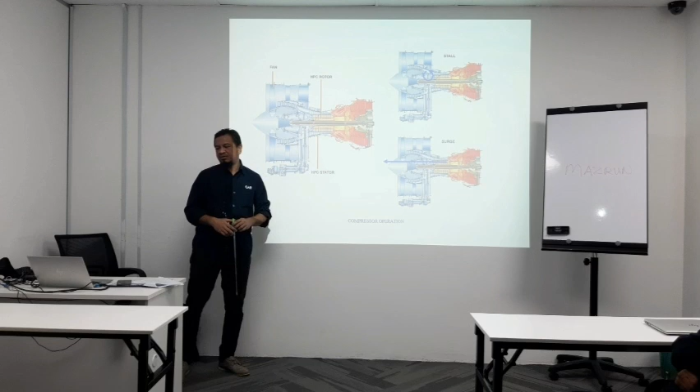So that's the difference between stall and surge. Surge is a much worse situation.

Can the surge situation cause an uncommanded in-flight shutdown? Surge may cause uncommanded in-flight shutdown, but it very seldom happens because normally surge happens at high power. In-flight shutdown can also happen from high power to shutdown depending on the type of failure. But normally during surge, the engine is forced to perform at high speed, high power, but the engine is unable to compress the air in the compressor, so it can cause surge.

So to cause an in-flight shutdown, it may happen, but in cases where it has happened to me, it's already a very severe failure, a very severe surge. Normally during engine surge, flight crew has to lower the engine thrust and maybe shut down, depending on the type of damage. Surge can cause high EGT. Normally during takeoff you have high power engine output. Whenever the engine surges, it causes high EGT, so when crew see this high EGT and vibration, they lower the engine thrust. Once they lower the thrust, if everything looks normal, they may continue the flight or they have to return to base. But if after lowering thrust it still vibrates and still shows high EGT, they may be required to shut down the engine. So it depends on the type of damage and the flight crew's decision to shut down or let the engine run.

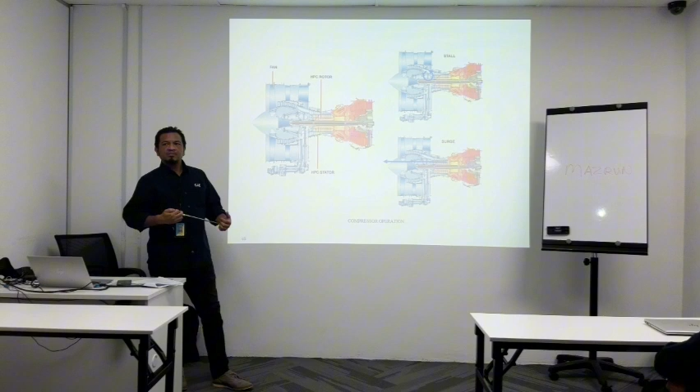Yeah, normally with engine surge there is a possibility of fire or smoke, but whether you will see fire or smoke depends on the type of damage. Sometimes surge is due to bird ingestion or any large FOD ingestion. If the ingestion passes through the secondary airflow bypass, there's normally less tendency to surge. But if the ingestion goes to the core, this is where it causes very severe surge. Normally in the core it will cause a tail fire, it may cause a loud bang, and it may cause smoke coming out.

Any other questions? Stall and surge? No.

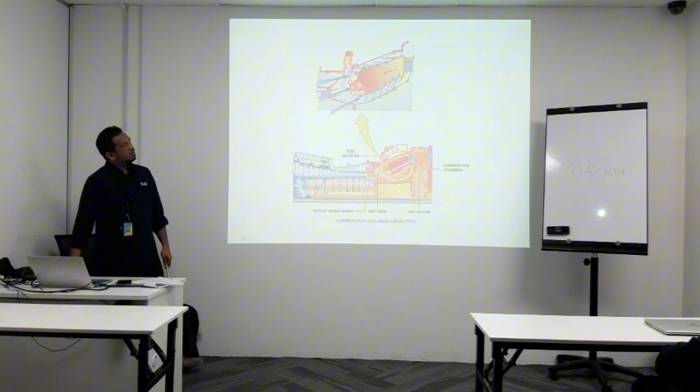Alright, we already went through the combustor. The combustor is where the fuel nozzle is housed, and the combustor provides gas expansion that allows the turbine section to extract energy from that expansion. We covered that the flame within the combustor is contained within the liner, the inner and outer liner. The air is used to provide the burning or combustion, and also to provide cooling, which is passed through the liner.

And then we already covered the HPT, which consists of a single stage, and the LPT which consists of 4 stages. With the 4 stages we were able to see the location of the LPT, where you can find the cooling tube around the LPT casing. Then we covered the gearbox, where there are many rotating devices, for example the IDG, PMA, hydraulic pumps, lube unit, fuel pumps, as well as the starter.

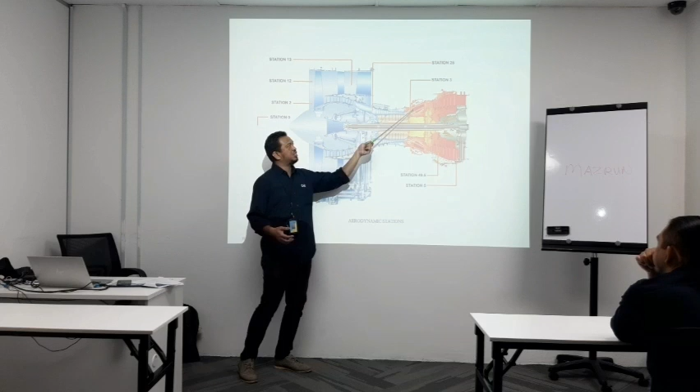And then we covered the engine station numbers. There are several station numbers around the engine, and some sensors are identified according to the station number. For example, if a sensor is located at a certain location, it is normally identified as a PS3 or T3 sensor, depending on the station number.

And the last topic is the boroscope port. There are many boroscope ports to allow facilities for inspection of the core of the engine, in the booster, compressor, combustor, as well as the turbine section.

Okay, any other questions, guys? No, all good? Very good. So I believe...

The engine basic principle as well as component location, it would be best to look at the engine itself. Normally we do have a practical session, so you can look at the engine to view much better the components as well as the engine system. You can find further detail during practical rather than looking only at pictures. But the principle of operation we already covered. Hopefully it will serve you well within the system.